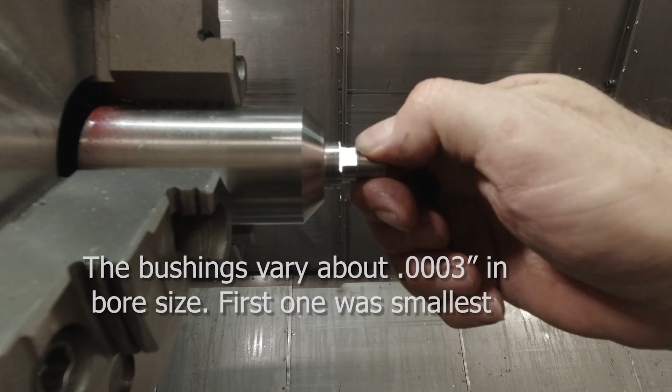Here's the little mandrel that I made to turn these with. I cut these notches in here because when I turned the first one, I couldn't get it off of there, so I had to pry it from the back. But other than that, it doesn't really need those notches. I turned this for as close a fit as I could get on this bushing without having it so tight that I couldn't get it on and off of there.

But there's only 2 or 3 ten-thousandths clearance between the bore of that bushing and this diameter, so it would run as true as possible. There's a radius on one side of these bushings, and I'm putting it up towards this because the turning tool left a little bit of a radius here, and so that matches up nicely like that. And this is about 50 thousandths shorter than the bushing's length, so the washer will clamp it between these faces on here.

And the maximum RPM this big machine can turn is 1600 RPM, so that's what I'm letting it turn for this hard turning. It's maybe a little bit too slow, but it seems to be doing all right.

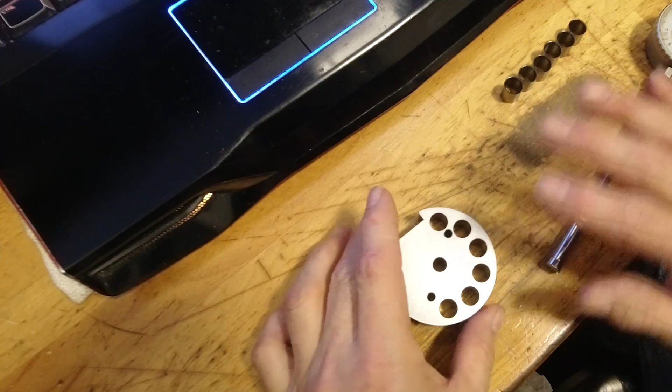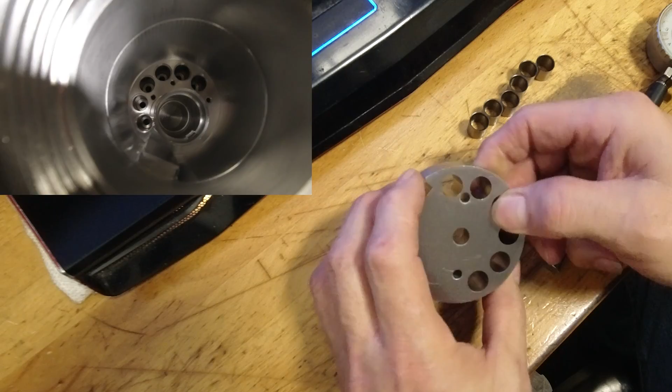Let's see if I can explain what I'm going to do with these bushings here and why I had to turn them down. This is what I call the drill plate for my drill fixture on the parts that I'm working on. And when I drilled this setup piece, which is aluminum, the holes were oversized, and I didn't really have this trouble the first time on the other part I did it on. But I don't know, there's something going on here.

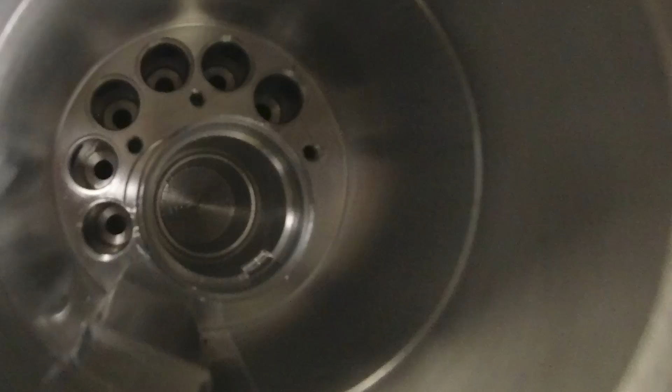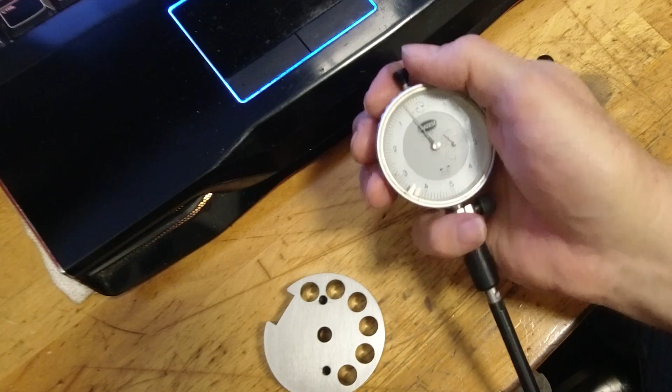Here's the ring gauge that I set this bore gauge to, and it's a 7/16 diameter. And if you can see that, yeah, that looks good. See, that's zeroed on 7/16, or 0.4375 on the gauge. And when I bored this drill plate, the top of these holes are still good to that size, but as you go down to the other side of the same hole here,

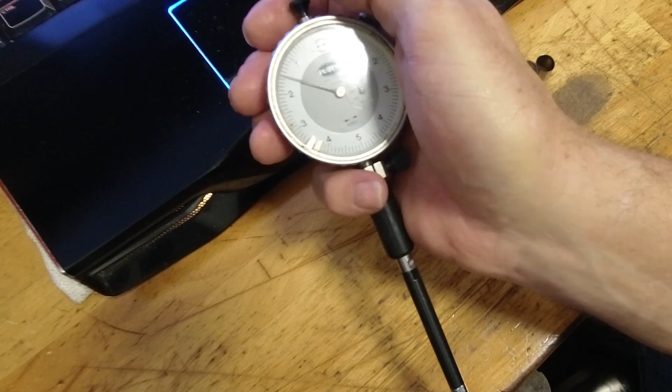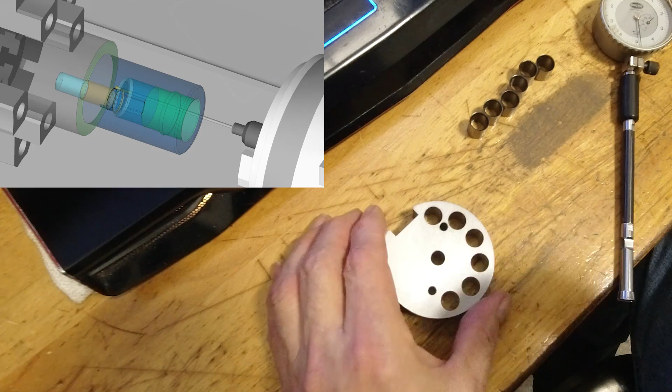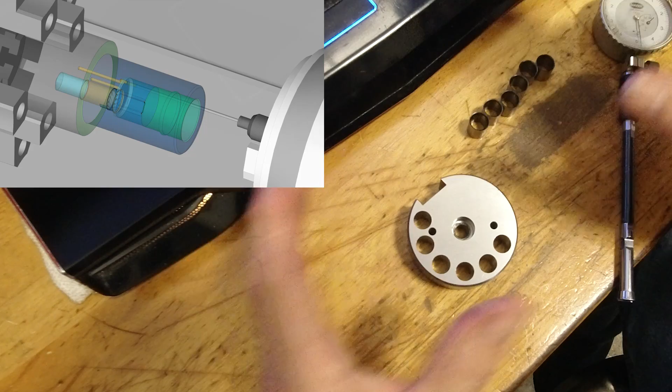now it's oversized. And I'm not sure if the aluminum caused this or not, and if this will happen in the titanium, because on the other part that I did, I don't even believe I did an aluminum setup part. I did this whole thing and I just drilled it and it was on size. But now, maybe it not being hardened, I don't know exactly what's happening here, but now I either got to remake this thing, which I could do, but then it would still be unhardened.

If I heat treated it, then I'd have to bore these holes in the hardened state, and that'd be kind of a hassle. So I got these drill bushings, and I was going to just press these in here, but the OD was such a size that they wouldn't fit next to each other, and so I had to turn them down, and that's what you just saw. So now I can bore this plate and fit these beside each other and have a hardened surface for the drill to run on, although like I said before, I didn't have this trouble in the part I did like this before.

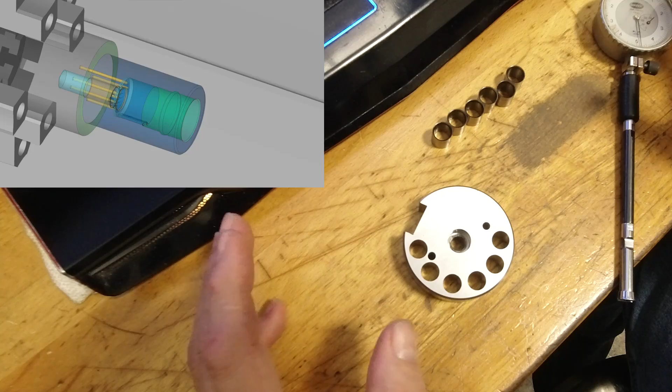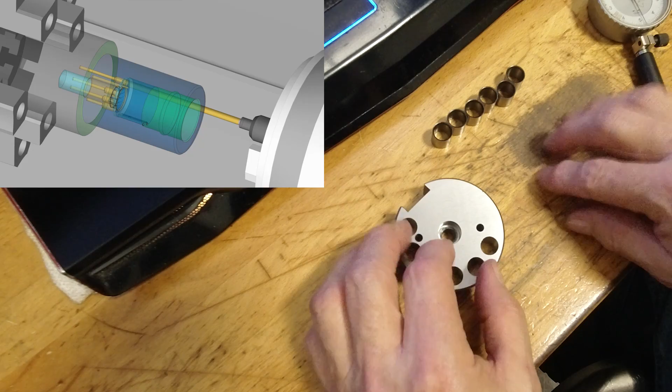But anyway, I can't afford to have anything go wrong with this. The setup piece I wasn't too concerned about. I was just setting up the program and making sure everything worked, and that's a whole other story in itself, because I was starting with a new software interface, this Esprit TNG, that I had to learn and get the cycles going the way I wanted. Although I really liked the software, it was a bit of a learning curve for me. It's more or less the same as Esprit, but the interface is different, so I had to learn the menuing and where to find the settings I wanted.

But in this case, I can't afford to have anything screw up on these parts, because that part already has a lot of work in it and expensive material. They're probably worth, I don't know, $15,000-$20,000 at this point, each one of these parts, and this would scrap the part if it didn't do this correctly.

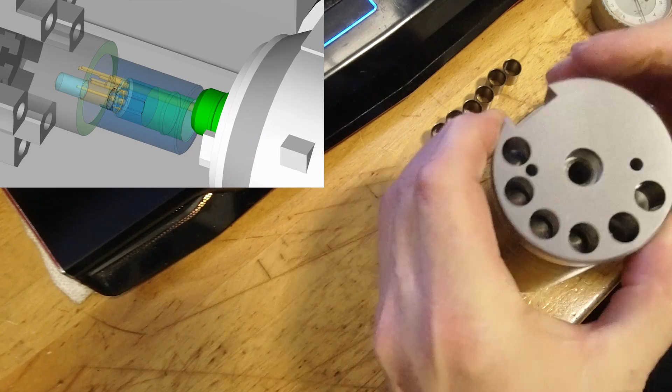So I'm going to bush out this drill guide thing, and then I found a piece of titanium in the shop here that's of the same type of titanium, and I'm going to actually mount each one of these drill plates, the one for the small drill, and drill those holes first, and then mount this one on there and simulate the whole operation on this piece of scrap material to make sure that I'm not drilling oversized.

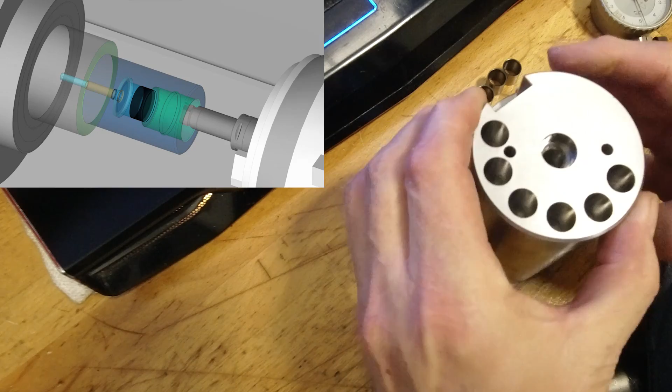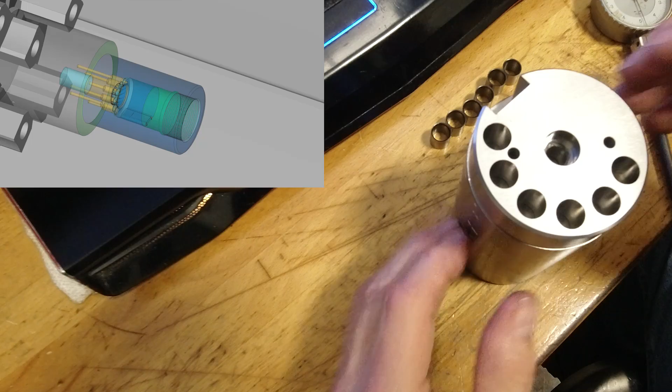If I can't get this to work, what I'll have to do is make a new drill guide thing here. The small drill seems to be doing all right. I don't think I've got a problem with it, and the size is not critical on it as far as plus or minus 1/1000 of an inch or 32 finish or anything. It just has to be a hole that intersects a hole further in the part.

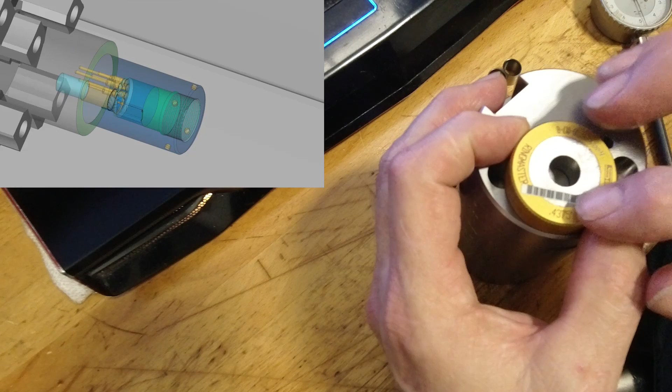But this particular hole, the finish was really good, but it went oversized, out of tolerance. And the drill is a .4375 like this gauge, and the actual dimension on the hole is .438 plus or minus 1/1000, so it could go up to .439 and still be in tolerance. But they went over that, and actually they got bigger down in there as it went in, and I don't know if the drill was wobbling around or something.

I'm not sure, and I don't think it'll happen in the titanium, because in general these gun drills don't drill oversized in this titanium material, and maybe it was the aluminum, I'm not sure. So I have to test it on the actual material, and I've got to be darn sure this is correct before I do it on the real part.

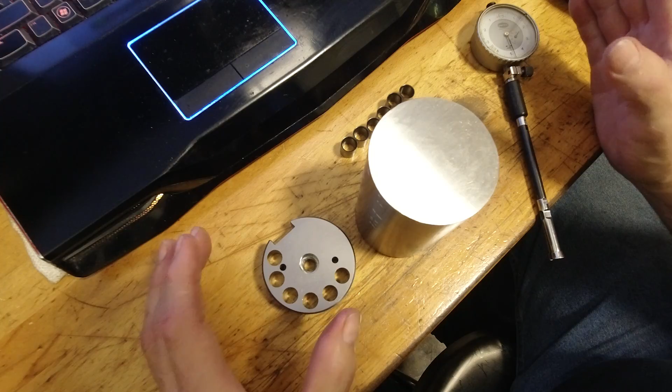So I'm going to test it here, and if I still can't get this to work, then what I've got to do is grind a form tool and drill it undersized, and come in with a form tool that will also create the chamfer and the counterbore that's at the top of the hole. So that's the other solution, but I'd rather not have to do that if I don't have to.

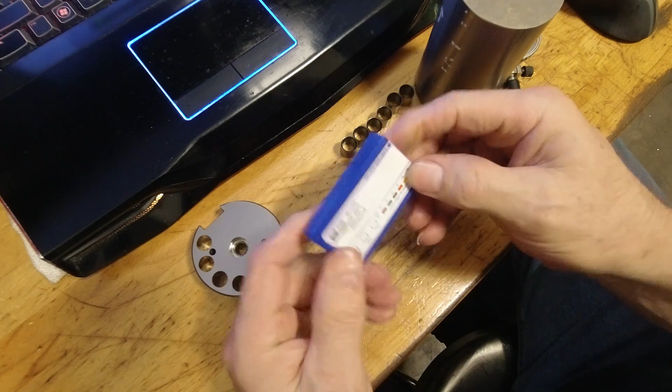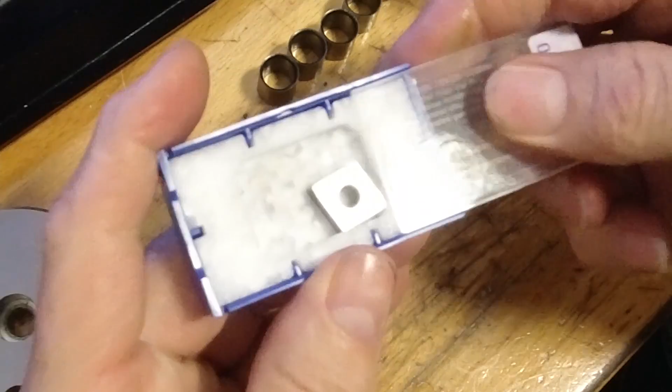So earlier in the video you saw me hard turning, and this was the insert I used to do it with. So this is a Sumitomo insert, and there's the numbers. I don't know if you can see that. And this particular insert, I think they call these their mini tips, because only that much of the insert there is the CBN material, and the rest of this is just a carbide insert. But this is sized to fit in a CNMG holder.

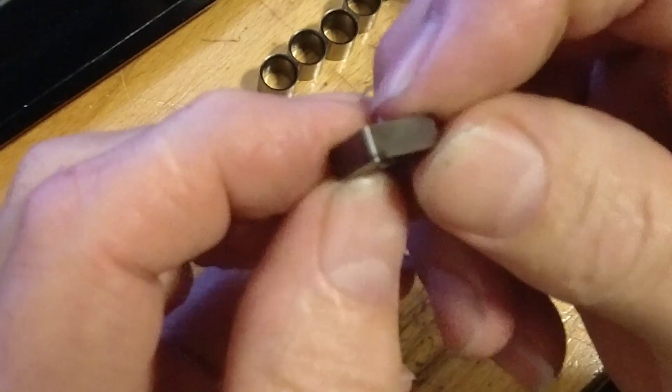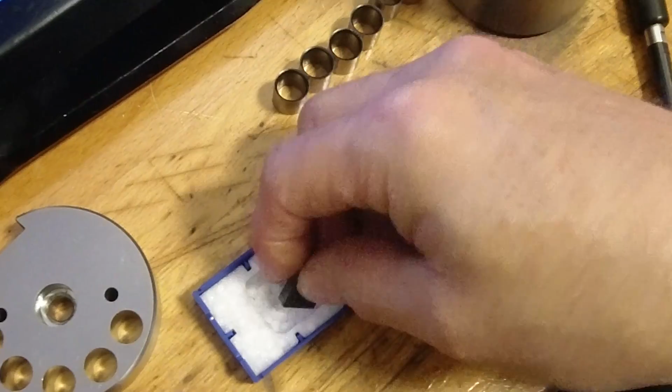And this is the tip that I actually turned all those bushings with, and you virtually can't see any wear at all on it. I can't even tell. If I can, I'll take a photograph with a microscope or something, but I can't see any wear at all on that tool. Maybe there is and I can't see it without a microscope, but these things generally work pretty good at the times I've used them.

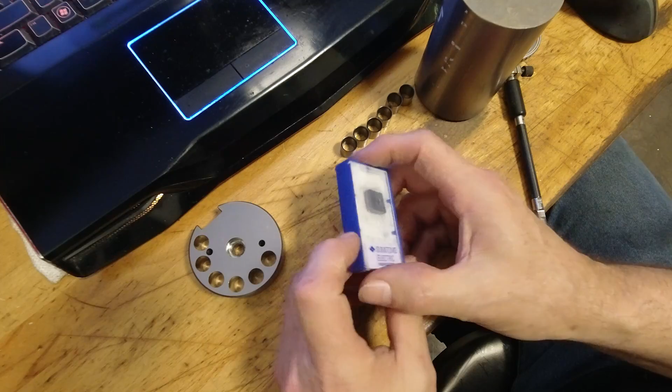So that was the insert, and the roughing passes were 4 thou feed, and the finish cut was 2 thou feed per revolution, and I was just running the lathe wide open at 1,600 RPM, because that's as fast as this big machine will turn.

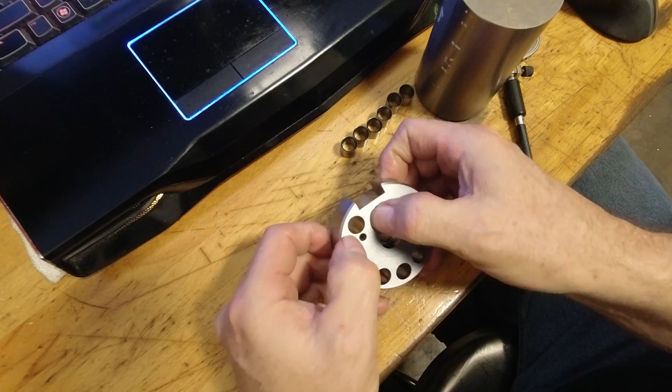So that's what this is all about, and now I have to set this up and bore some counterbores to fit these bushings in here and press them in, and set this up to try this out. This will actually be flipped over, because this is the way it's oriented in the actual operation, of course, because the drill is coming in this direction into the holes.

And I have to first drill the 218 diameter hole deeper than this port goes. This port goes 1 inch deep, more or less 1 inch 10/1000ths, I think. And then I'm going to drill with the gun drill again in the real material to see if that holds size.

Because I think it may be the aluminum that's causing me the problem here too. If that drill tends to push out on the aluminum, it might cut on the side of that gun drill where the flute is ground, and it generally doesn't do that in titanium. So that's where we're at right now with this.

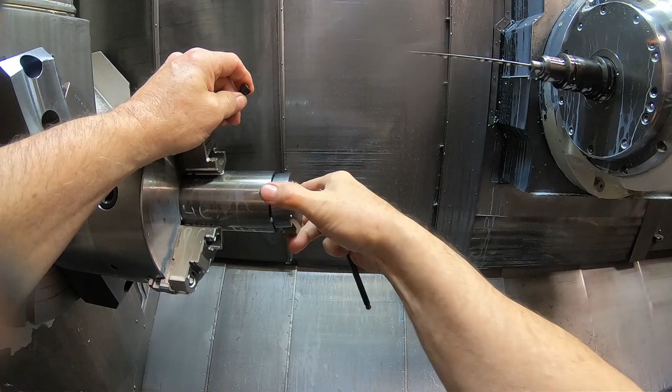Okay, I jogged the machine away. I've just drilled the very first hole here only. We're going to change the drill plate to the bigger drill. See, I just drilled this hole. I shallowed this up in the program. I copied a little section of the program.

I processed code, I should say, for a little section of the program, and I reduced the depth of the 218 thousandths drill to just a little beyond the port's depth. So up here, the port goes about 1 inch 10 thousandths deep from this face. I had to be careful to set my 0 point out here because I'm going to run the exact same program except for reducing the depth of the small drill so that I can really test it as it would be actually running, so to speak.

So now we're going to put this larger drill plate on. It's going to go this way like this, and we'll drill this first hole in it only. There's actually a regular gun drill and then a flat bottom gun drill.

I think I'm going to put a brand new regular gun drill in just to run it in here, and then the flat bottom is going to be the same one that I ran before. And then I'm going to take this off and see where we end up with the hole size.

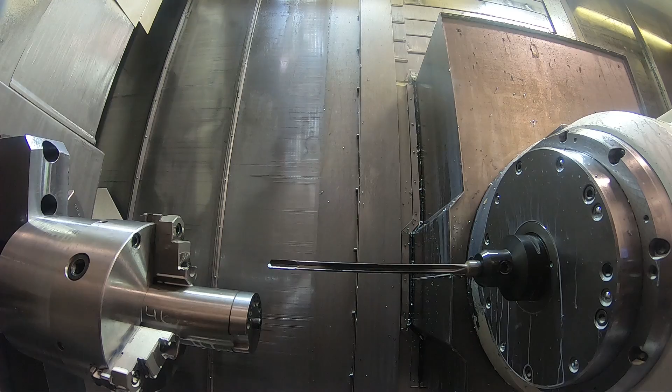Drill doesn't really look too bad, but I'm going to change it anyway just to start with something brand new. Okay, brand new factory grind. Touch it off. And I got to remember this isn't 0 up here, so I got to be careful.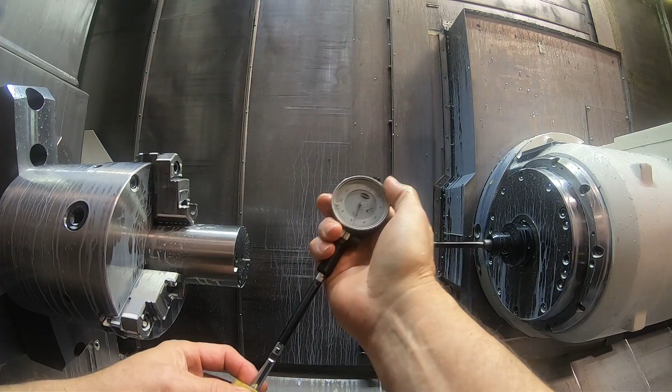Move the drill back so we can check this. And take the plate off. See how we did on this hole here. Check our gauge. It's reading a couple of tenths different today. Okay, it's zeroed. Let's see how we did. Hopefully. Okay.

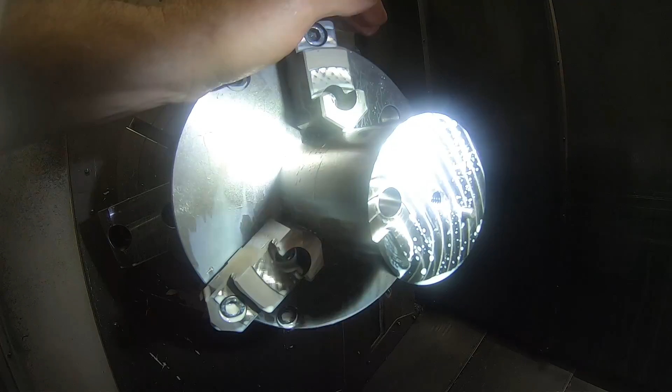Not too bad. It's not out of tolerance. This is 37 and a half, so 38. It could go up 1/1000th and a half on this gauge and still be in tolerance. So that looks pretty good. It feels a little bit, it's not terribly smooth in there. Finish is not too great, but

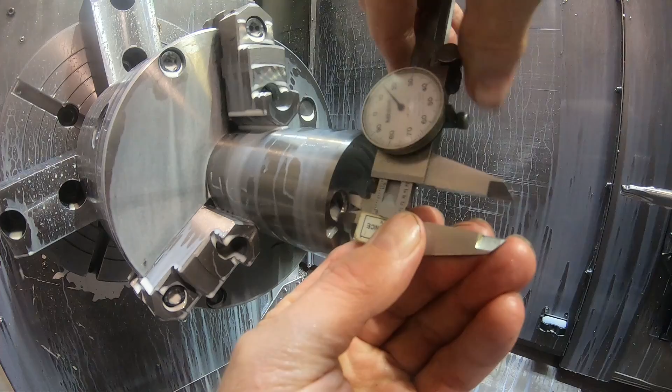we run the spot facing tool. I got that in this program. We'll see what we come up with there. Diameter's good on that. Finish looks good. It didn't chatter or anything, so that's working perfect, that tool.

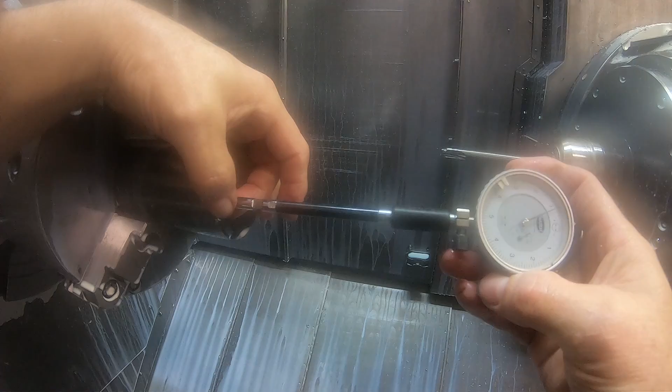The gun drill could have left a little bit nicer finish. I might try to grind my own grind on the gun drill and see if that does better, because that factory grind sometimes is off a little bit. So I'm going to sharpen one up and try that. But it seems to have, that's the bottom radius there.

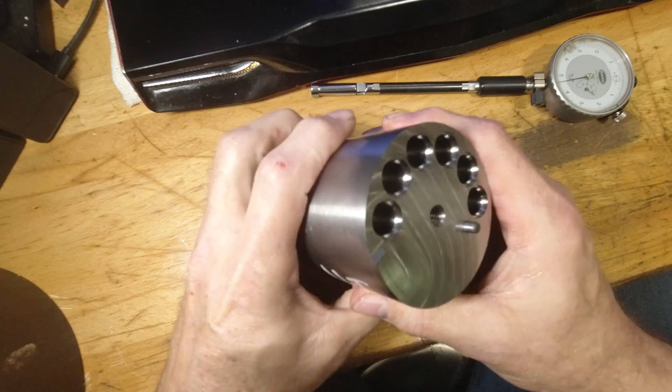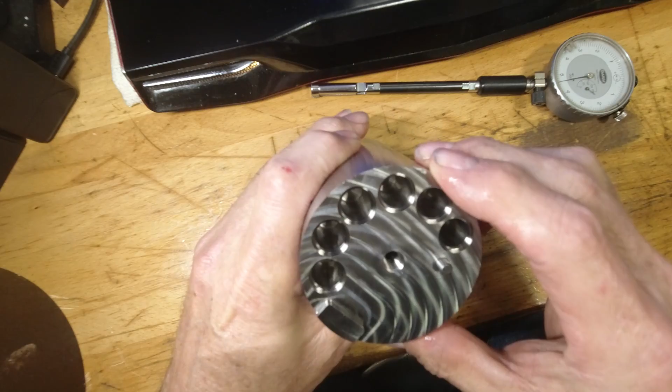Okay, here's where we stand with this right now. I drilled more holes. I ground a couple different drills, and I'm not really happy with what I'm coming up with here, unfortunately. The last 3 holes I got pretty good. If I hold this, they're kind of all right size wise.

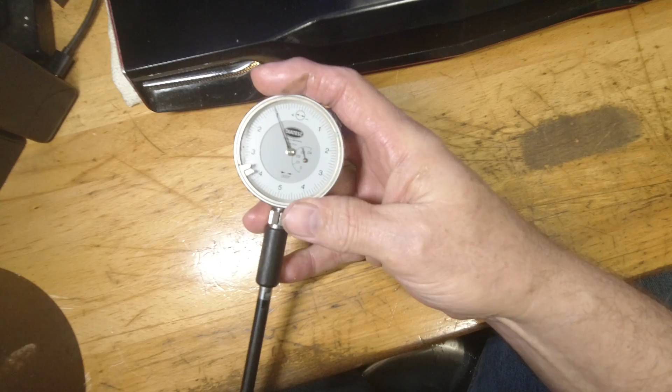See, this is that hole, but their finish is kind of a little bit, I don't know, I'm not happy with the finish on them, and it's too close to not being right, if you know what I mean. It's kind of like if a little bit goes wrong, it's going to be off, and I can't afford that on this part. I don't know if you can see. Let me see if I can maybe get some light down.

I don't know if you can see that. I mean, it's not bad. It's not that bad, but it's kind of just too close to screwing up.

I'm thinking I'm gonna go with my second alternative, which was to drill these undersized, these 7/16 flat bottom holes, which is basically the same program. I just have to get different drills, and I have to rebush that one piece that I did earlier in this video for a smaller size.

And then I've got to grind a form tool similar to the form tool that I was forming this top counterbore and the chamfer with, but it'll go all the way down and form all the way to the bottom of the hole. And so I think I'll reduce the drill size to a 64th under 7/16, whatever that is, and I'll drill and flat bottom the hole, and then I'll come in with this form tool.

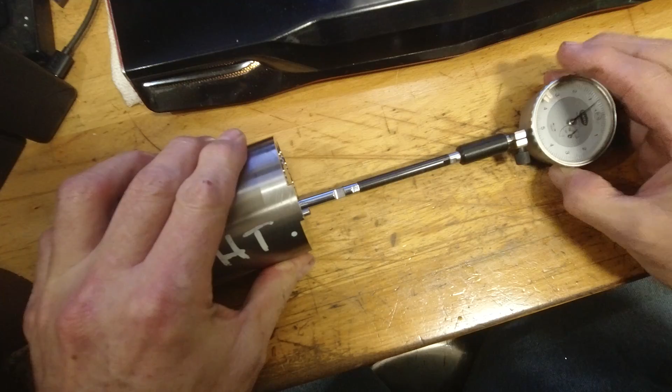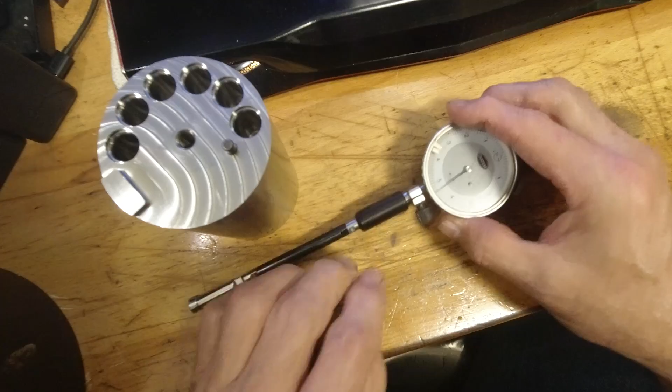You know, this almost worked, and I did it before one time, but I can feel, I mean, you can't tell watching the video, but I can feel the coarseness of the finish with these dial bore gauges. You can feel finishes real good with these things. It's almost like a profilometer. You go in there and you can feel it,

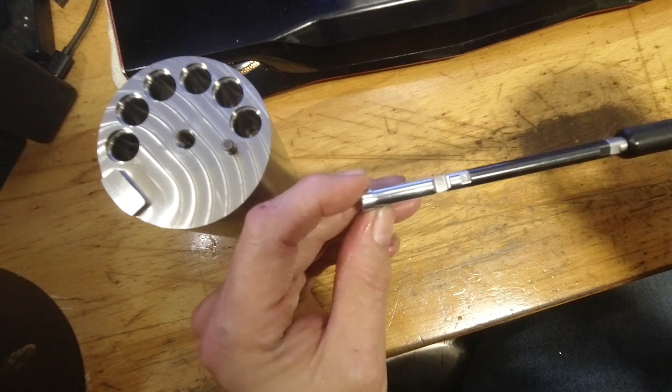because this type, the flat bottom type that doesn't have the big spherical end on it, so it can go to the bottom of a hole, has a very narrow measuring surface on it, and you can feel irregularities in the finish real well with this tool, and it kind of is bothering me here. When prints say a 32 finish on it and the inspector gets it, he usually likes to have it like a 16 to really pass, and this isn't that.

I can feel it in there. I mean, the size is all right now, and I could polish it, but I don't really like to polish on stuff if I don't need to. So unfortunately, I got to go the other route.

So that's going to be it on this video, and in the upcoming videos I want to show doing this whole end and the shaping or broaching of the key and everything, and the 3D, 5-axis tool path. And I was hoping to get to that in this video, because I hadn't posted a video in a little more than 3 weeks, and it was because I've been learning this software and trying to get this setup working. So hopefully all of that more interesting stuff will be in the next video.

The only reason I bring this up in this video at all is to show you that sometimes you go through this stuff, and on these elaborate, expensive parts, you can't take a chance and have something go wrong, or at least I'm not going to, because I don't want to pay for that part and the labor and everything that's gone into it up to this point. So got to go with my alternative plan here, unfortunately.